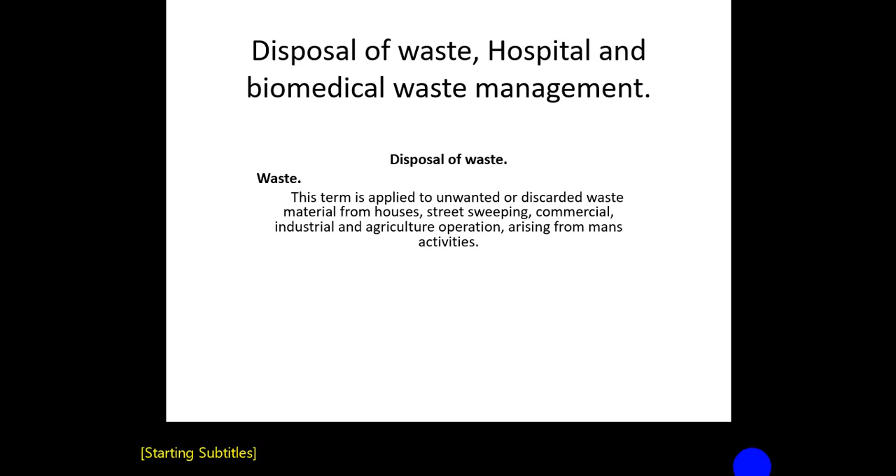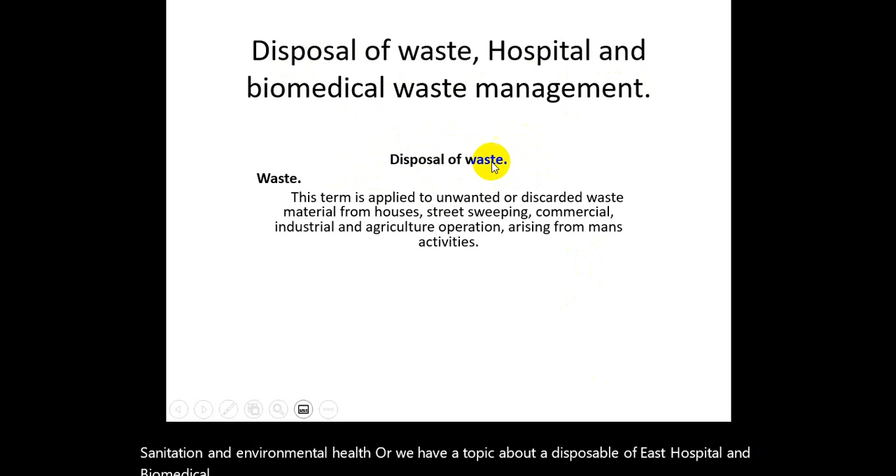Sanitation and environmental health. We have a topic about disposal of waste, hospital and biomedical waste management. First we will discuss sanitation and environmental health, then we will discuss waste and refuses.

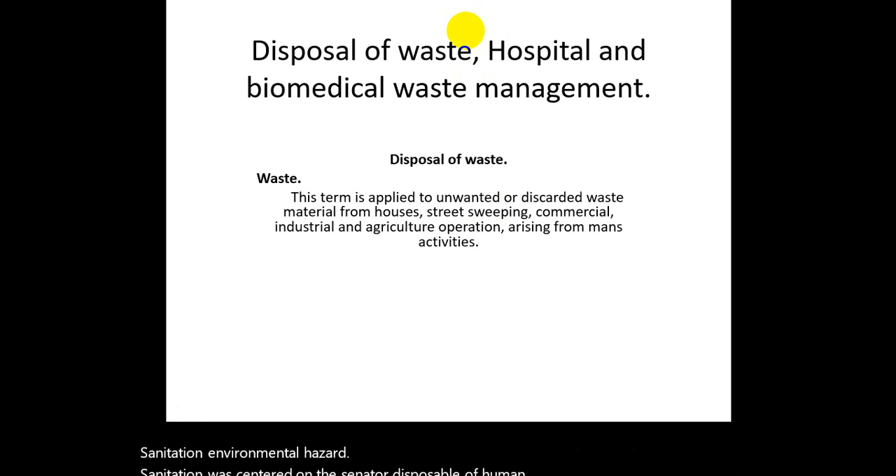Sanitation and environmental health in earlier days was centered on the sanitary disposal of human excreta. Even now, for many people, sanitation still means the construction of latrines. Actually, the term sanitation covers the whole field of controlling the environment with a view to prevent diseases and promote health.

The increased demand for utility services, both domestic and industrial, leads to an accumulation of waste products in water, in the air, and on the ground.

Inadequate supply and distribution of poor quality water for drinking and domestic uses increases the likelihood of exposure to gastrointestinal infection. Storage of water for domestic use in uncovered storage tanks, and accumulation of surface water and sewage due to inadequate drainage, where climatic conditions are favorable, provide conditions suitable for the dissemination of malaria and other vector-borne diseases.

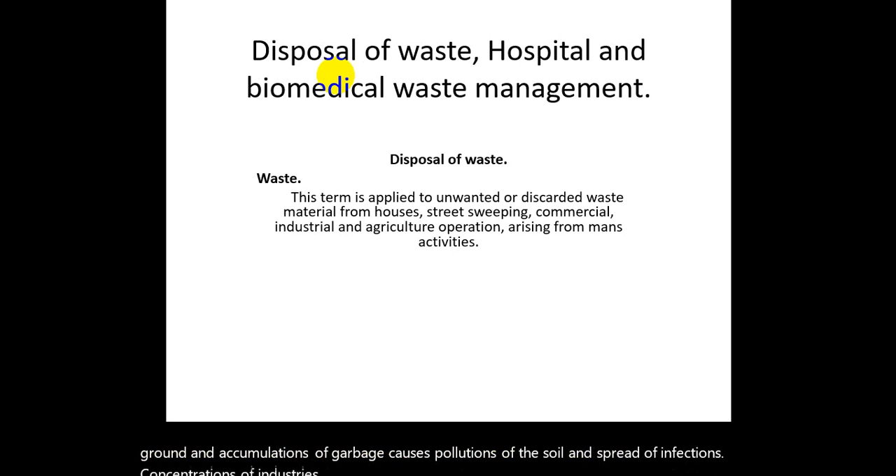Lack of sanitary facilities leading to flooding of the ground and accumulation of garbage causes pollution of the soil and spread of infections. The concentration of industries in and around the community not only creates greater demand on water supplies, drainage, housing, and transport services, but also creates its own problems of waste disposal and air, water, and soil pollution.

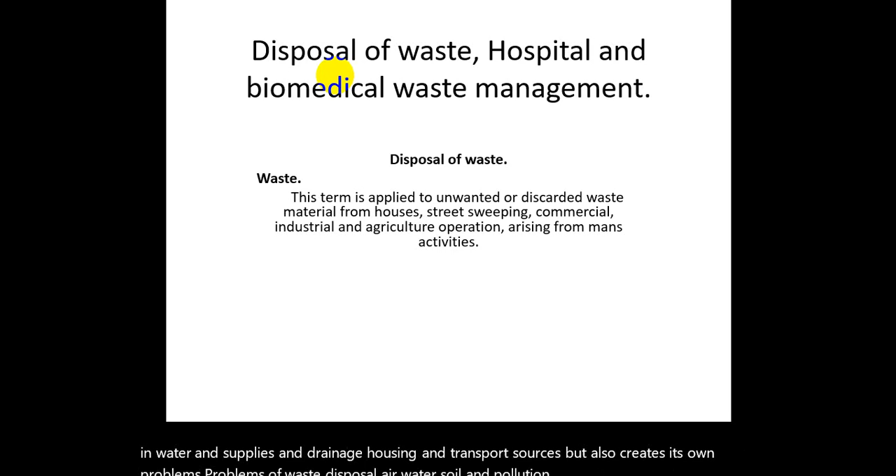So, waste. The term waste is applied to unwanted or discarded waste matter, while refuse means the solid discarded material produced by human habitation, except human excreta.

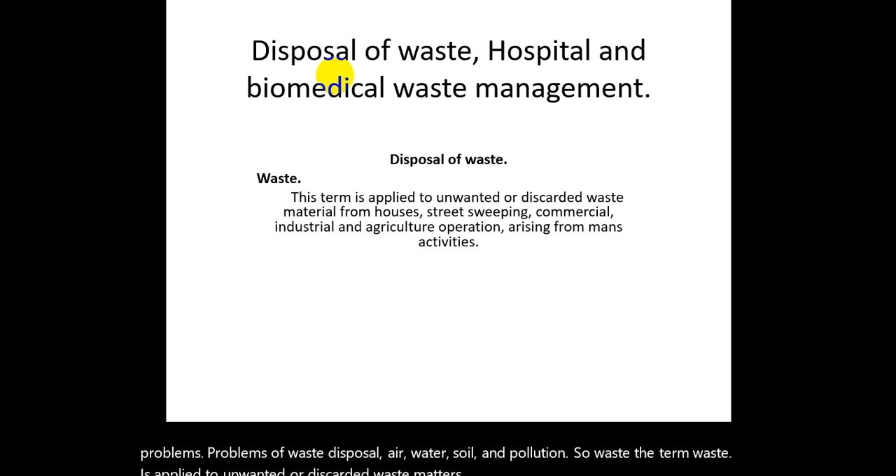The accumulation of solid waste in many environments constitutes a positive health hazard. The term is applied to unwanted or discarded waste material from houses, street sweepings, commercial, industrial, and agricultural operations arising from man's activity.

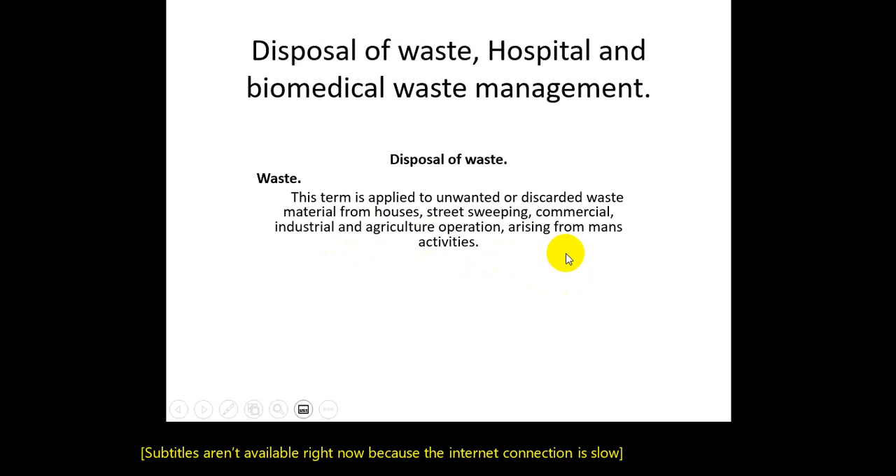It is a positive health hazard for the following reasons. Number one, the organic portion of solid waste forms a medium for fly breeding. Number two, garbage and refuse attract rats. Three, pathogens may be conveyed to man through flies and dust.

Fourth, there is a possibility of water pollution by rain water passing through deposits of fermenting refuse. Fifth, there is a risk of air pollution if there is accidental or spontaneous combustion of refuse. And sixth, piles of refuse are a nuisance from an aesthetic point of view, causing bad smell and bad sight.

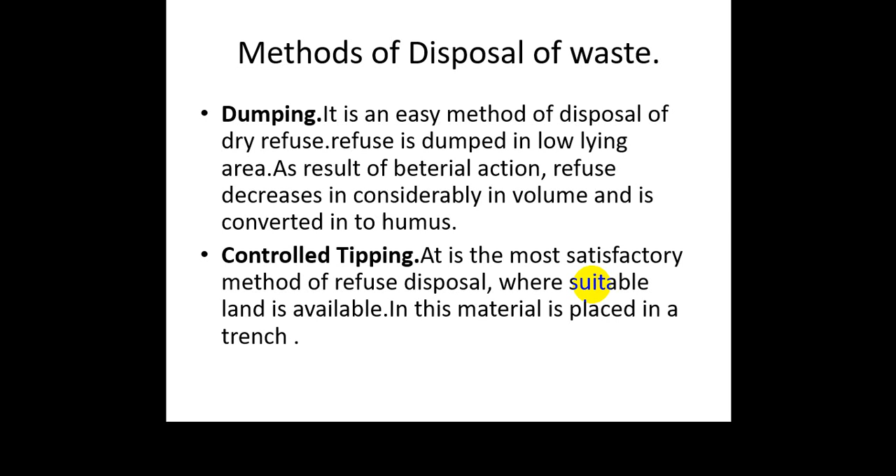These are the methods of waste disposal. First we will discuss the sources of waste. Number one, domestic refuse is ash.

Dumping is an easy method of disposal of dry refuse. Refuse is dumped in low-lying areas, and as a result of bacterial action, refuse decreases considerably in volume and is converted into humus.

Market refuse contains large proportions of perishable vegetable and animal waste matter, and rubbish, broken glass, and iron pieces. Third, street refuse consists of leaves, straws, paper, animal droppings, and litter of all kinds. It is collected by the street cleaning services, or scavenging.

Fourth, stable litter contains mainly animal droppings and leftover animal feed. Fifth, dead animals. Sixth, industrial refuse consists of a wide variety of waste, ranging from completely inert materials such as calcium carbonate to highly toxic and explosive compounds.

A number of methods are recommended for the disposal of refuse, and these depend upon the economic conditions and availability of land and labor. In rural areas, the cooked garbage may be fed to animals, and the rest put in the compost pit or manure pit.

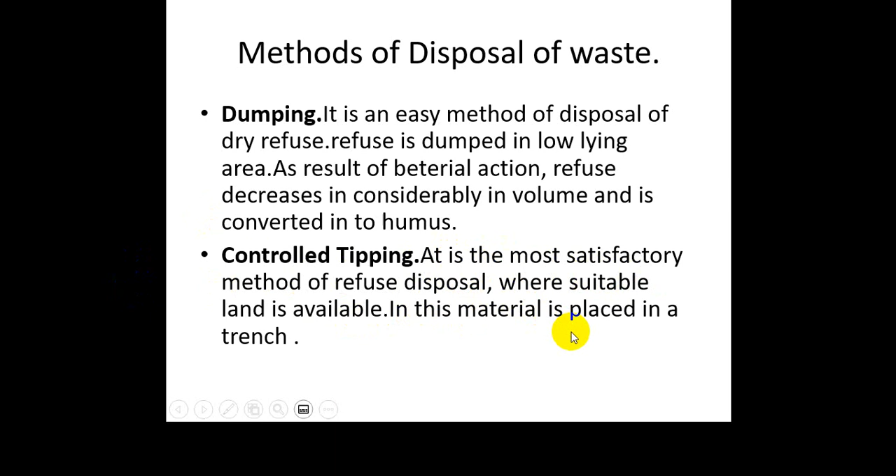Controlled tipping is the most satisfactory method of refuse disposal where suitable land is available. In this method, material is placed in trenches. Incineration.

Refuse can be disposed of hygienically by burning, or incineration. It is a good and harmless method used in some towns of Pakistan. Clinkers left after burning are used in making roads.

Refuse can be disposed of by burning. It is the method of choice where suitable land is not available.

Composting. Composting is a method used for the combined disposal of dry refuse and cow dung or night soil. It is carried out in a brick-lined pit, two feet deep, four feet wide, with sloped sides. Length varies, but twenty feet is suitable.

It is a process of nature whereby organic matter breaks down under bacterial action, resulting in the formation of a relatively stable humus-like material called compost, which has considerable manure value for the soil. There are two methods of composting in operation.

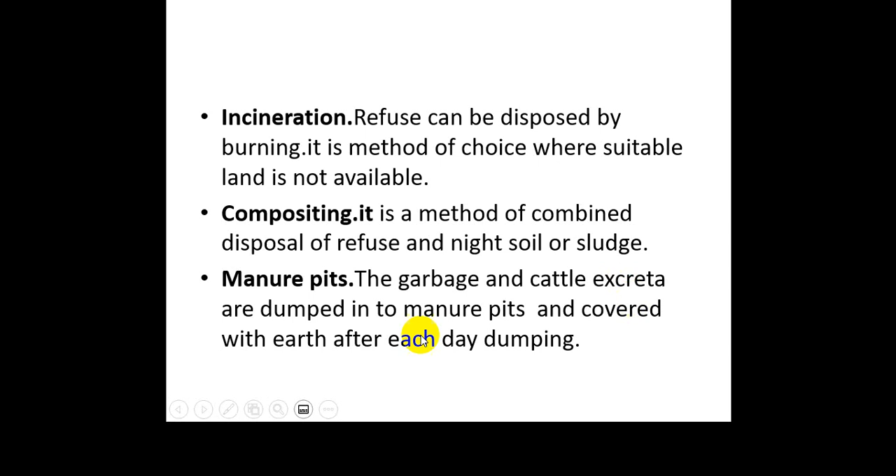It is a method of combined disposal of refuse and night soil or sludge. Manure pits: the problem of refuse in rural areas can be solved by digging a manure pit by the individual householder. The garbage and cattle excreta are dumped into manure pits and covered with earth after each day's dumping. Burial.

This process is similar to landfill or composting. Refuse is buried in digs which gets converted to soil and humus. This method is used for small camps: a trench 1.5 meter wide and 2 meter deep is excavated, and at the end of each day the refuse is covered with 20-30 centimeter of earth. When the level of the trench is 40 centimeter from ground level, it is filled with earth and compacted, and a new trench is opened.

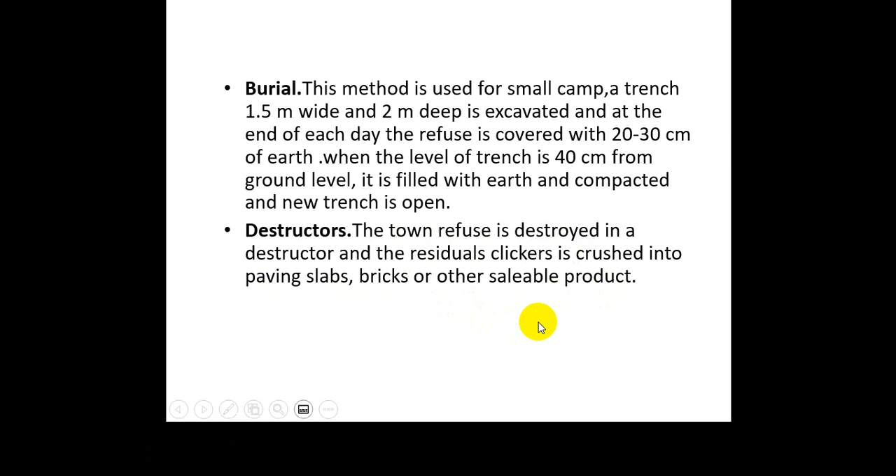Destructors: the town refuse is destroyed in destructors, and the residuals/clinkers are crushed into paving slabs, bricks or other sellable products.

Sewage. Sewage is wastewater from the community containing solid and liquid excreta derived from houses, street and yard washing, and industries. Sullage is wastewater which doesn't contain human excreta, for example wastewater from kitchens and bathrooms.

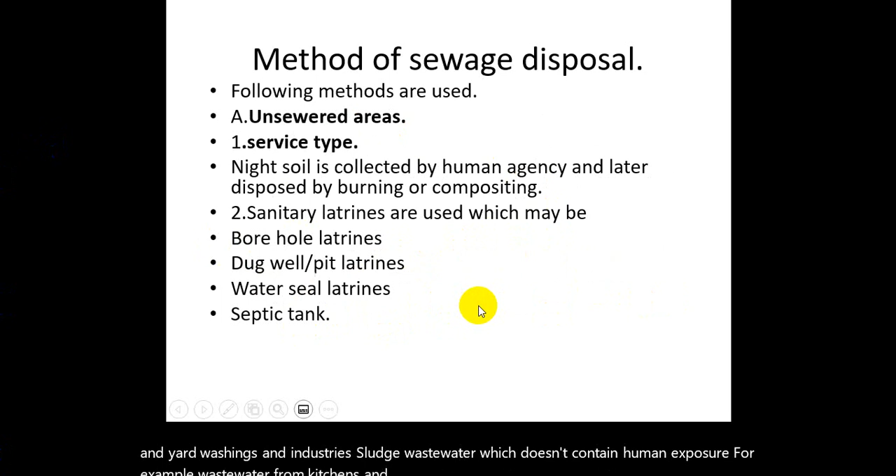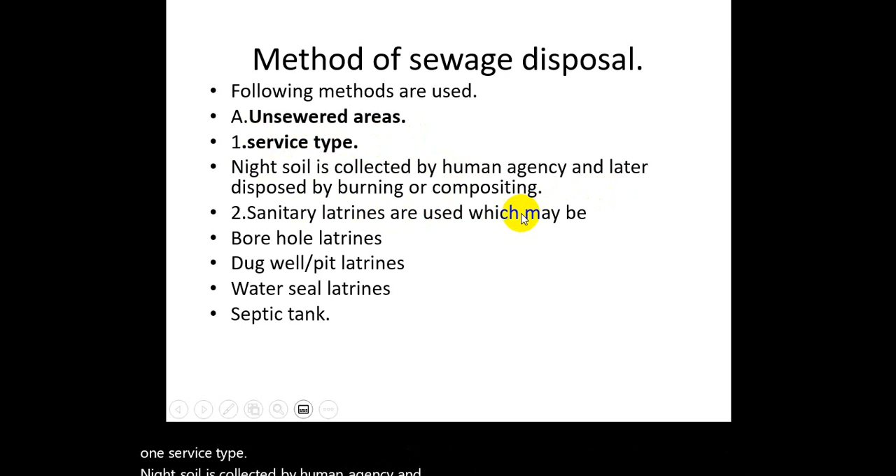Methods of sewage disposal, following methods are used. A. Unsewered areas: 1. Service type - night soil is collected by human agency and later disposed of by burning or composting. 2. Sanitary latrines are used, which may be borehole latrines, dug well/pit latrines, water seal latrines, and septic tanks.

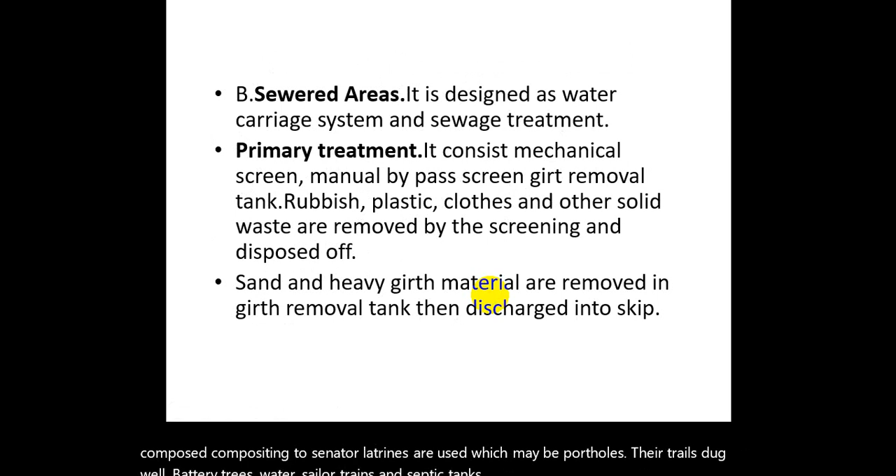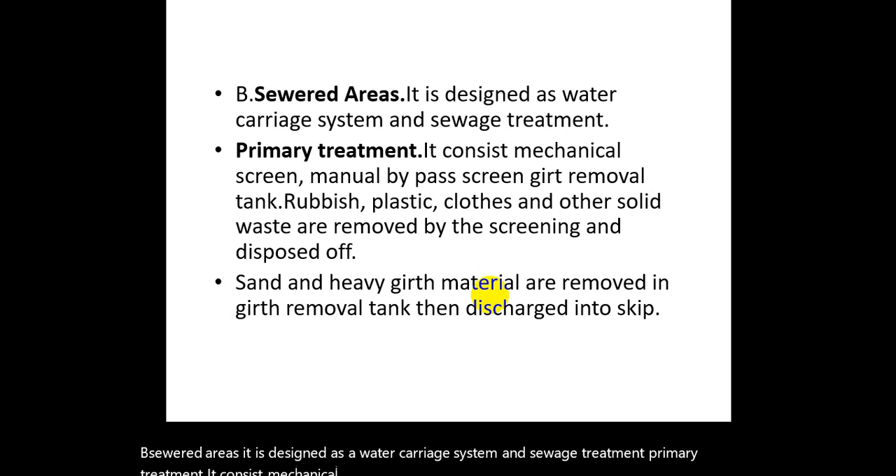B. Sewered areas: it is designed as a water carriage system with sewage treatment. Primary treatment consists of mechanical screen, manual bypass screen, grit removal tank; rubbish, plastic, cloths and other solid waste are removed by screening and disposed of. Sand and heavy grit material are removed in a grit removal tank, then discharged into skip.

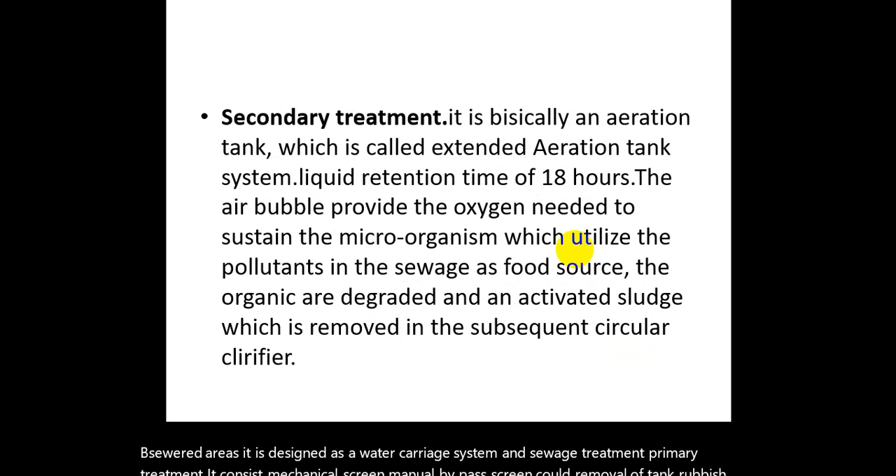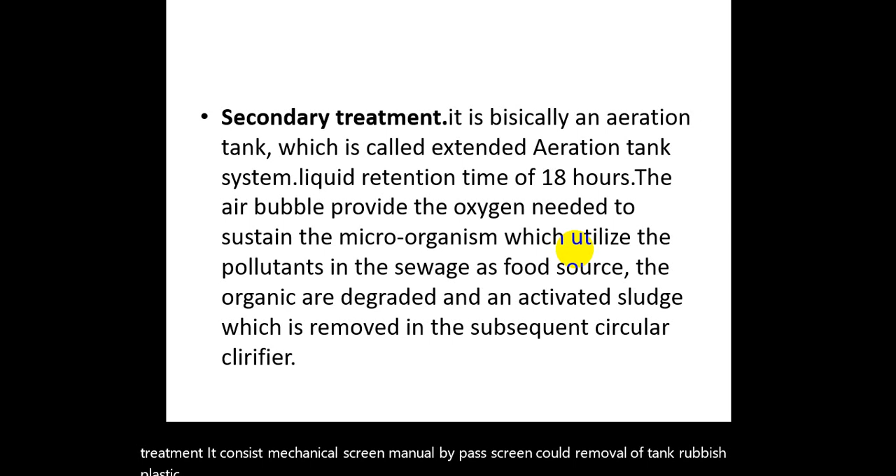Secondary treatment is basically an aeration tank, called an extended aeration tank system, with liquid retention time of 18 hours. Air bubbles provide the oxygen needed to sustain the microorganisms which utilize the pollutants in the sewage as a food source. The organics are degraded and an activated sludge is produced, which is removed in the subsequent circular clarifier. Food/pollutant in sewage plus microorganism activated sludge plus oxygen air bubble, when treated, equals treated water plus sludge.

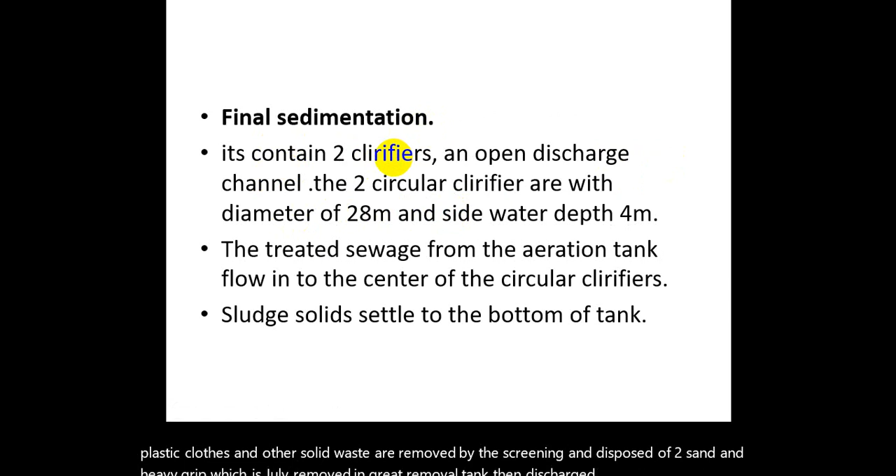Final sedimentation contains two clarifiers and an open discharge channel. The two circular clarifiers have a diameter of 28 meters and side water depth of 4 meters. The treated sewage from the aeration tank flows into the center of the circular clarifiers, and sludge solids settle to the bottom of the tank.

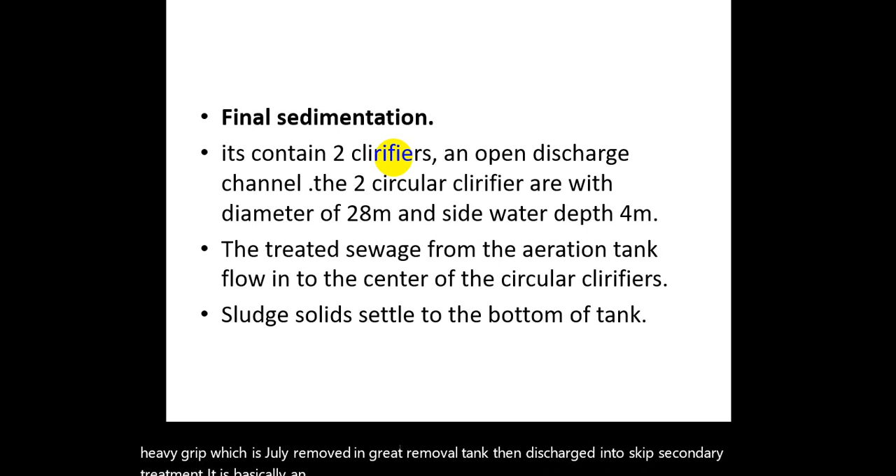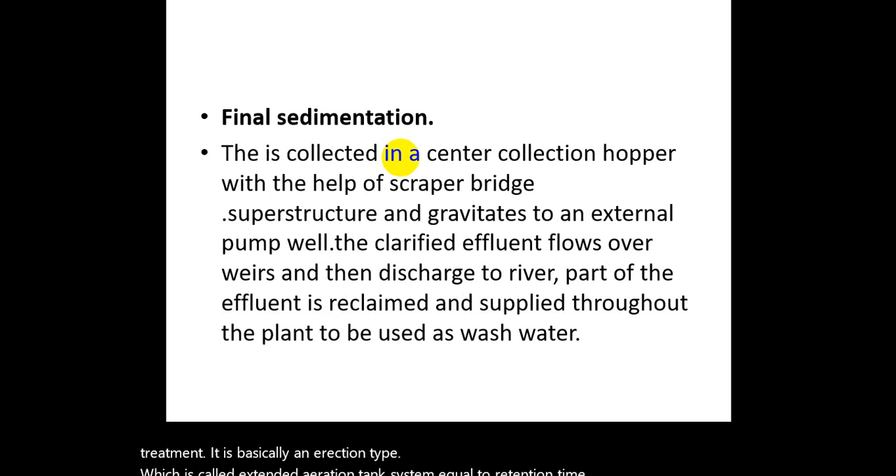In final sedimentation, sludge is collected in a center collection hopper with the help of a scraper bridge and superstructure, and gravitates to an external pump well. Clarified effluent flows over weirs and is then discharged to the river. Part of the effluent is reclaimed and supplied throughout the plant to be used as wash water.

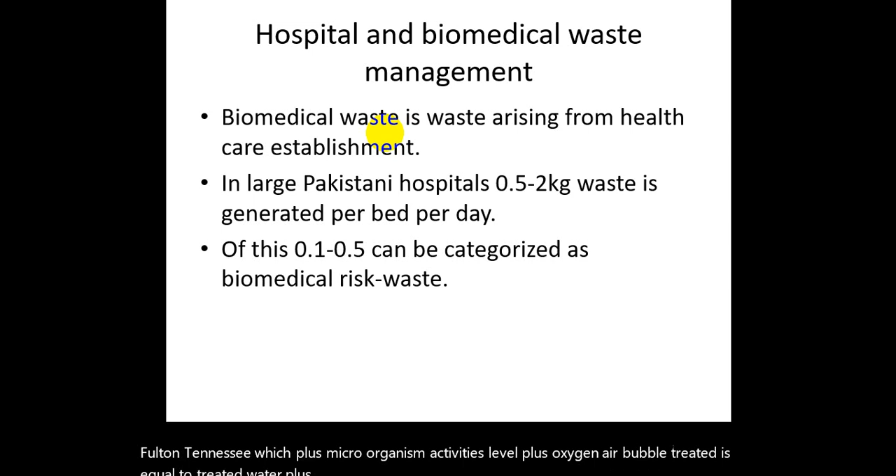Hospital and biomedical waste management. Biomedical waste is waste arising from healthcare establishments. In large Pakistani hospitals, 0.5 to 2 kg of waste is generated per bed per day, of which 0.1 to 0.5 kg can be categorized as biomedical risk waste.

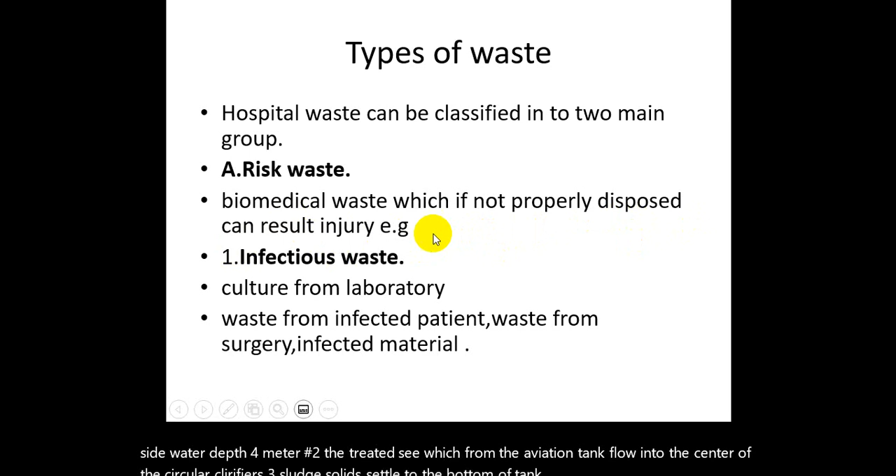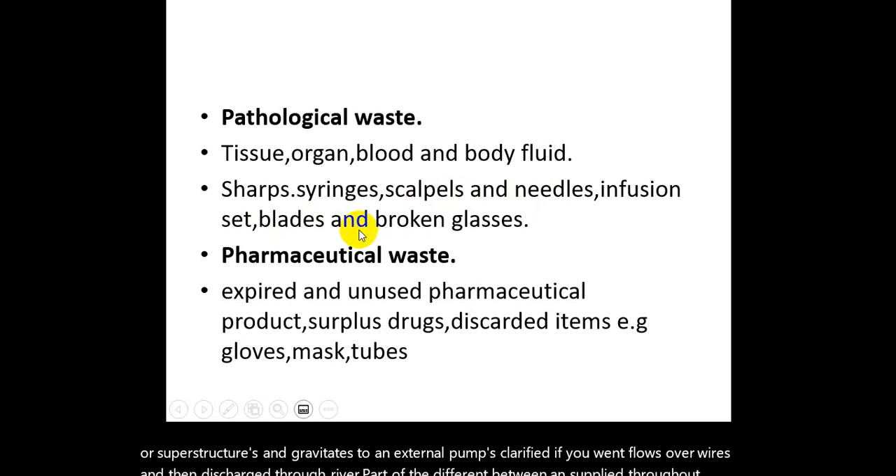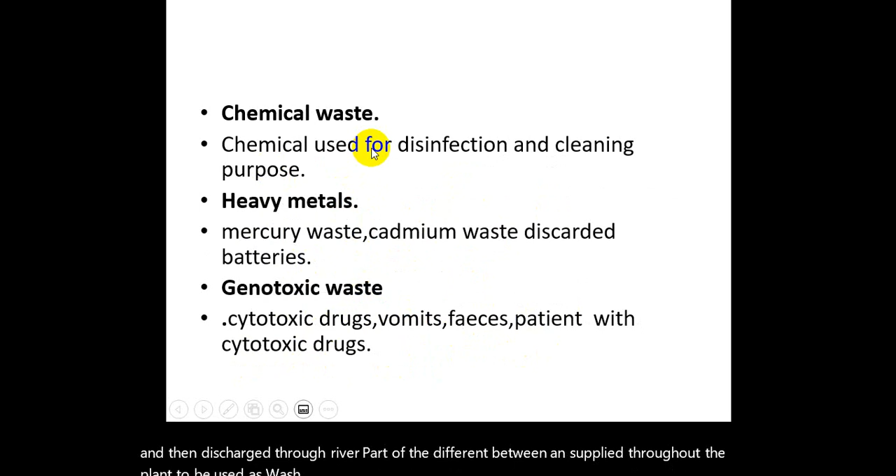Types of waste: hospital waste can be classified into two main groups. A. Risk waste - biomedical waste which, if not properly disposed of, can result in injury: infectious waste (culture from laboratory, waste from infected patients, waste from surgery, infected material), pathological waste (tissue, organ, blood and body fluid), sharps (syringes, scalpels and needles, infusion sets, blades and broken glasses), pharmaceutical waste (expired and unused pharmaceutical products, surplus drugs, discarded items such as gloves, masks, tubes), and chemical waste (chemicals used for disinfection and cleaning, heavy metals, mercury waste, cadmium waste, discarded batteries).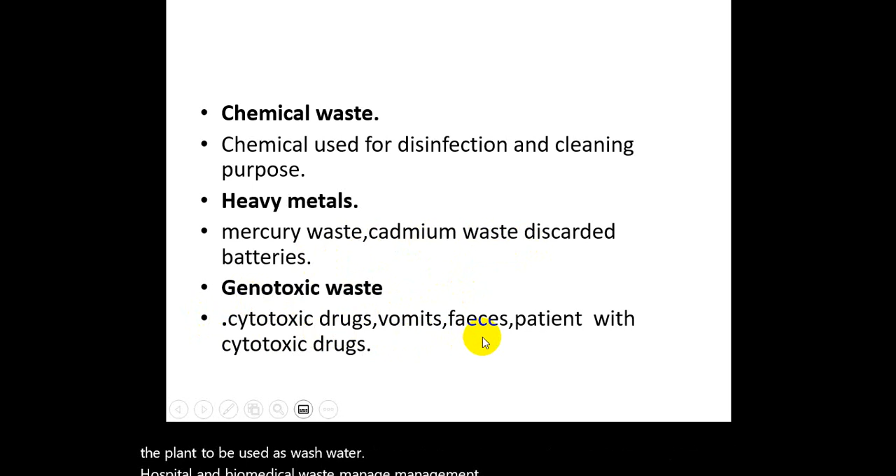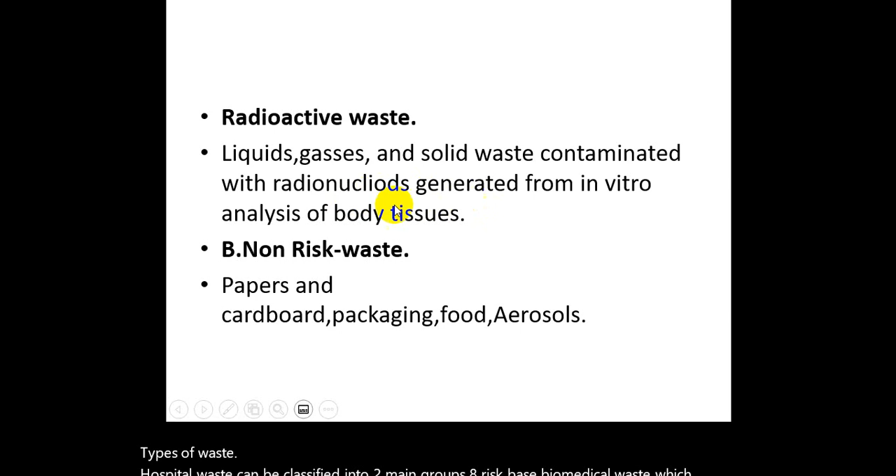Genotoxic waste includes cytotoxic drugs, and vomit or feces from patients treated with cytotoxic drugs. Radioactive waste includes liquids, gases and solid waste contaminated with radionuclides generated from in vitro analysis of body tissues. B. Non-risk waste includes paper and cardboard, packaging, food, and aerosols.

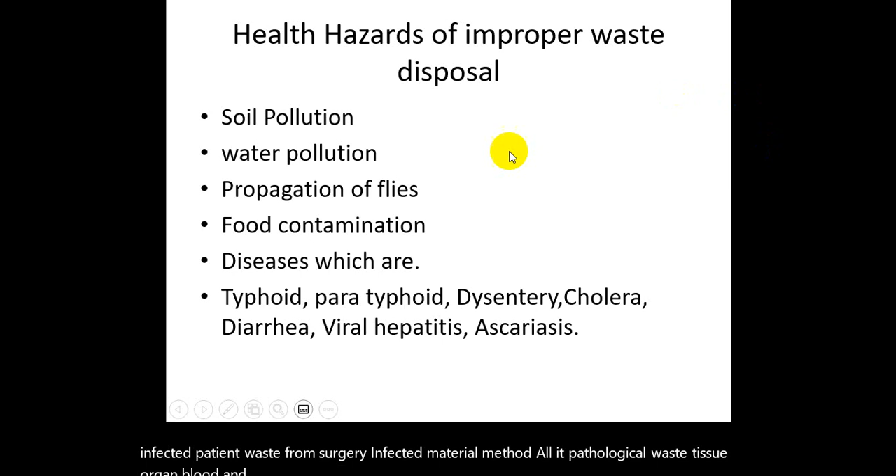Health hazards of improper waste disposal include soil pollution, water pollution, propagation of flies, food contamination, and diseases such as typhoid, paratyphoid, dysentery, cholera, diarrhea, viral hepatitis, and ascariasis.

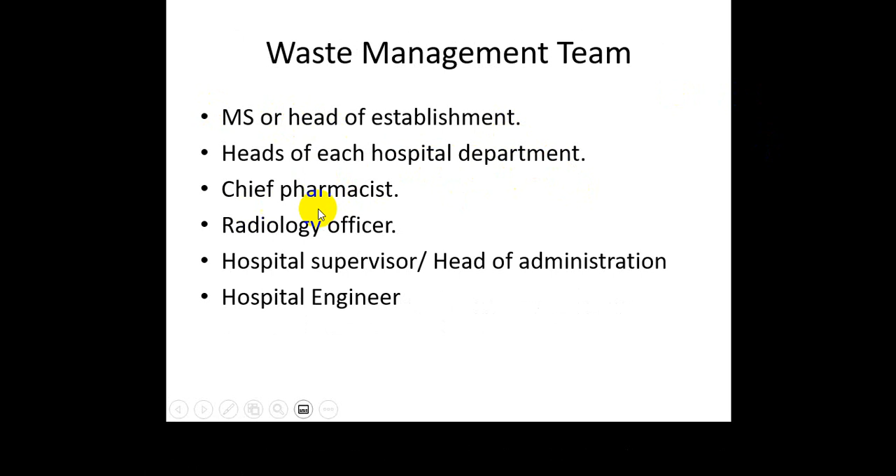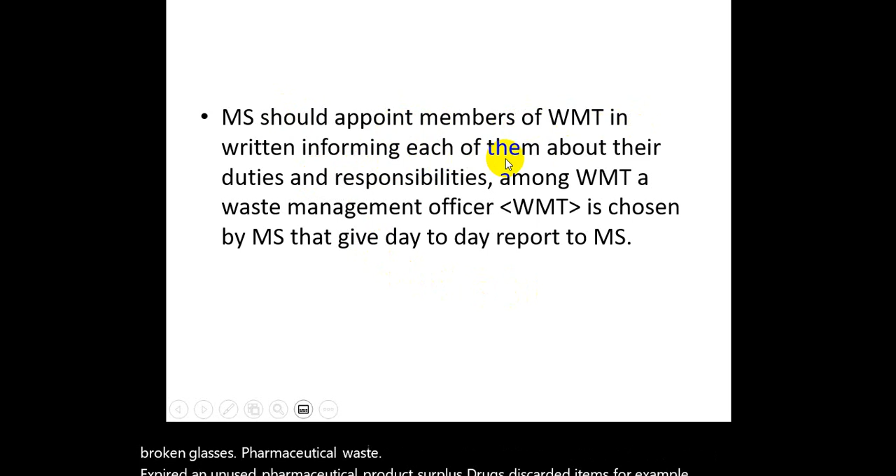Waste management team includes the MS or head of establishment, head of each hospital department, chief pharmacist, radiology officer, hospital supervisor/head of administration, and hospital engineer. The MS should appoint members of the WMT in writing, informing each of them about their duties and responsibilities. Among the WMT, a waste management officer is chosen by the MS who gives a day-to-day report to the MS.

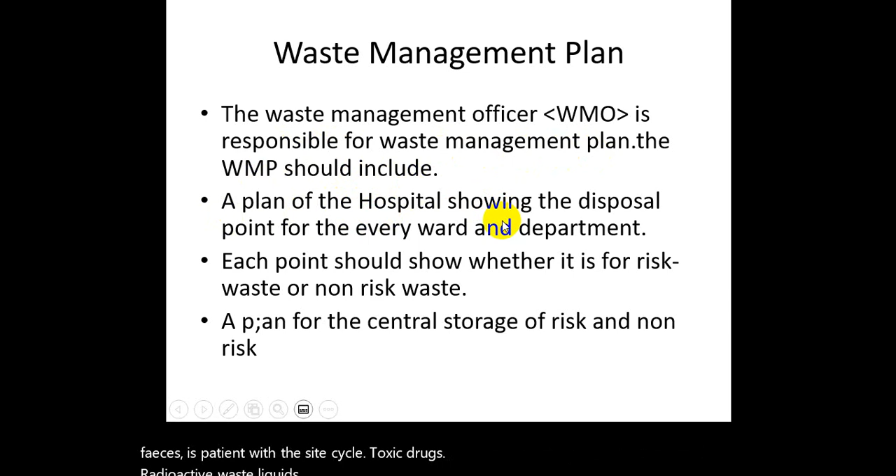Waste management plan: the waste management officer is responsible for the waste management plan. The WMP should include a plan of the hospital showing the disposal point for every ward and department; each point should show whether it is for risk waste or non-risk waste; and a plan for the central storage of risk and non-risk waste.

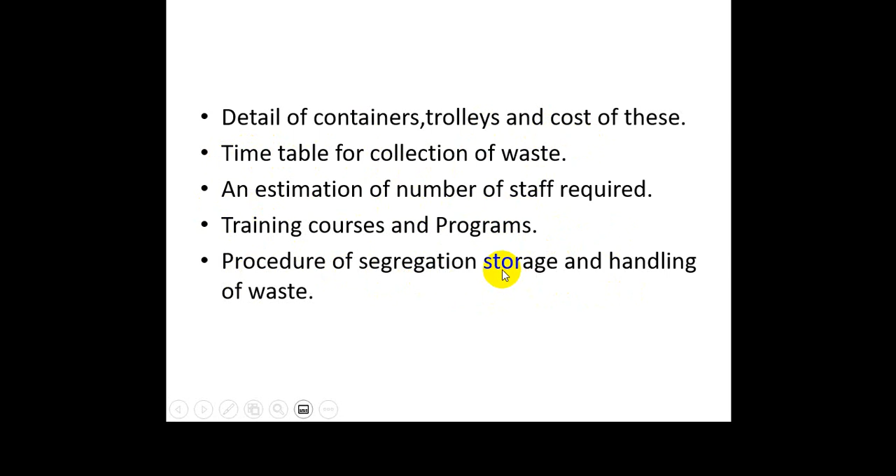Details of containers, trolleys, and the cost of these; a timetable for collection of waste; an estimation of the number of staff required; training courses and programs; and a procedure for segregation, storage and handling of waste.

Steps in disposal of waste: waste segregation, waste collection, waste storage, waste disposal. Waste segregation: risk waste should be separated from non-risk waste. This segregation should be done at the place of production of waste, that is bedside, laboratory, operation theatre, delivery room.

A. Non-risk waste, the major portion of waste, is placed in black containers in all areas of the hospital. Risk waste, other than sharps, chemical, or radioactive, is placed in yellow plastic bags. Sharps are placed in containers resistant to penetration and leakage.

Waste collection: sanitary staff and sweepers must wear protective clothing and must ensure that waste is collected at least daily, including face mask, leg protectors, industrial boots, and eye protectors.

Waste transportation: a suitable wheeled trolley with high sides is used for transport of waste. The municipal authority is responsible for off-site transportation of collected waste from the hospital.

Waste storage: there should be separate storage areas for risk and non-risk waste. The storage area must have the following characteristics: it should be large enough with an impermeable base; the site should be away from food storage or food preparation areas; and no waste should be stored for longer than 24 hours.